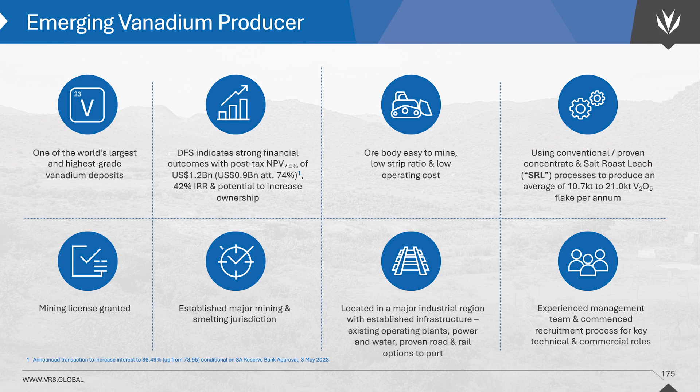We're in the Bushveld, an established mining and smelting operation jurisdiction. There's about 30 to 35 mining and smelting operations in the area, and because of that it's a major industrial hub. We've got mining, smelting, power, water, access to individuals, access to vanadium expertise, which is key here. We've got an experienced team who are currently in the recruitment process for developing our construction team.

Our market cap's low, it's $40 million, and the focus in the next few months is really bridging that gap, implementing our financing plan. We're in detailed discussions with debt financiers at the moment. We've got several term sheets across a range of different debt funding options. We'll be announcing offtake in the next few months and securing strategic investors as well.

Vanadium has two main areas: steel and alloys represents about 90% of the production of vanadium, and that's pretty much how our phase 1 project would be based on. In terms of getting this banked, it's around steel producers and getting that up to speed. We're getting good traction with steel producers with the vanadium pentoxide, so that's our phase 1 project.

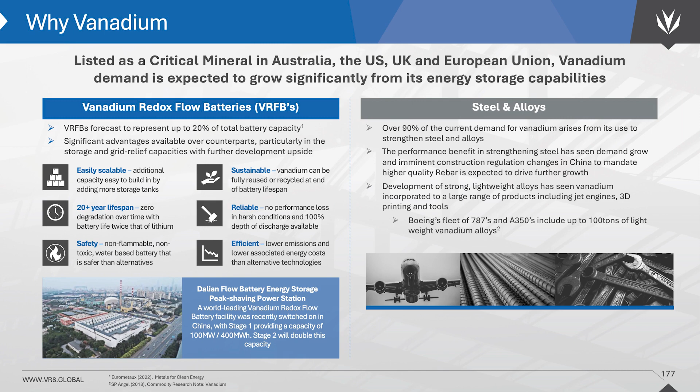Vanadium redox flow battery, for me, this is one of the exciting areas and one of the reasons why I've taken on the role. VRFBs, a good example is the 100 megawatt VRFB battery in Dalian, China. They commissioned and have been operating that since October last year. They're in the process of doubling capacity up to 200 megawatts. The key there is it's grid scale. It's a potential displacement of coal-fired and gas-fired power stations with renewable energy, and it's got the capability to do that, being a vanadium redox flow battery.

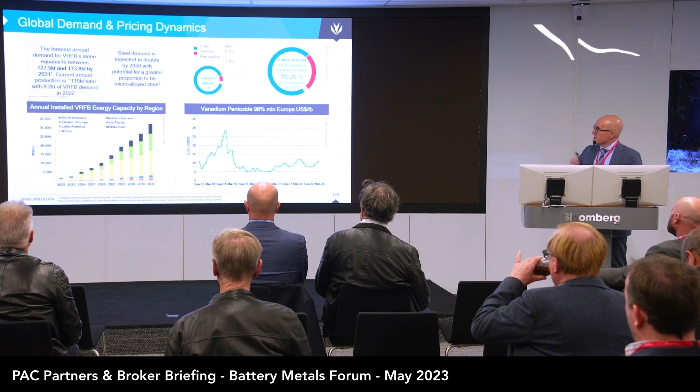The key point in this diagram is the circle in the middle. 90% represents the steel market, VRFB is currently about 6 to 7%, and aerospace for the pentoxide is 2 to 3%. The key here is the equity upside from my perspective once we're in production - 15 to 20% of the market will constitute production for vanadium for VRFBs.

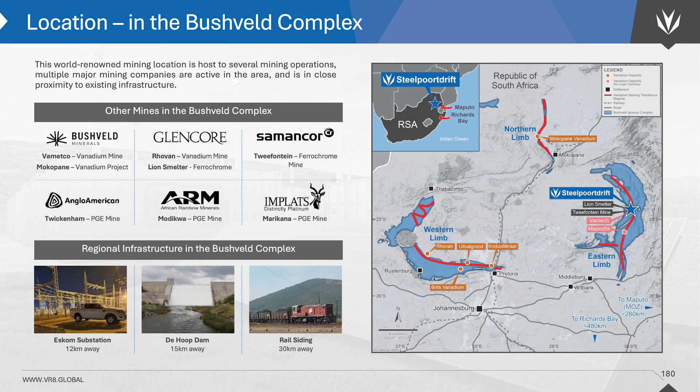We'll be looking to haul the concentrate across to the SRL plant, the salt roast leach site. And we're looking to put in an overland rope conveyor. Basically it's a ski lift with a hopper, and that'll remove the need to transport concentrate through the community and out through the road, and it'll be electrified.

And what we're doing on both sites is we're implementing solar and vanadium redox flow battery on the concentrate side, just big enough as a reserve for Eskom. There are issues with Eskom, and that's the reason why we're implementing that. And our partner on that, we've got the industrial park. They're building a 35 megawatt solar facility earmarked for us. We only need 13 megawatts of that, so it's plenty of excess capacity. And more importantly, it's a major mitigant for Eskom power.

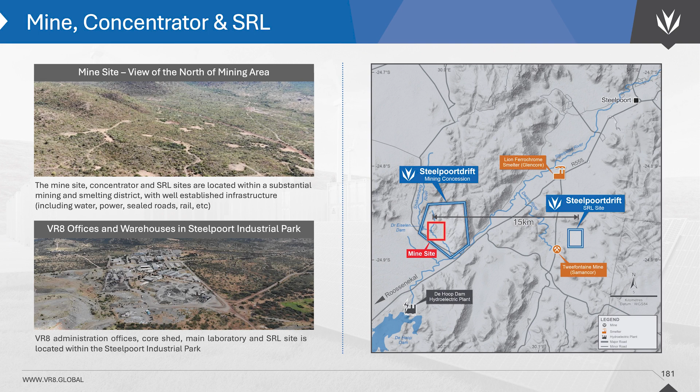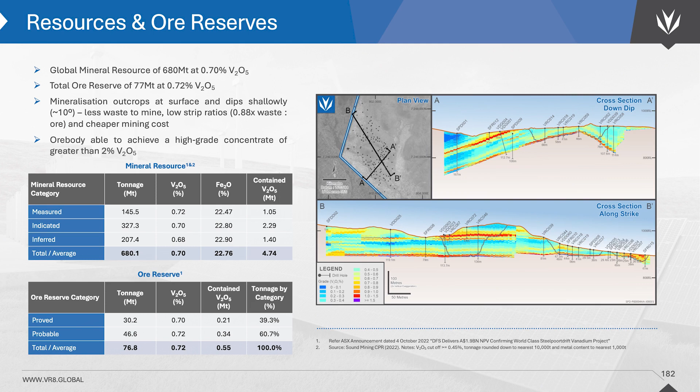I won't spend too much time on this, other than it's big, it's flat, it's outcropping, and we're only mining for the DFS about 12% of that. So we've got lots of upside and optionality.

Won't go into detail here, other than it's been used in the Bushveld. The flow sheet here on the concentrator and the SRL plant, techniques that are proven. In terms of getting banks across the line, I think this is bankable technically.

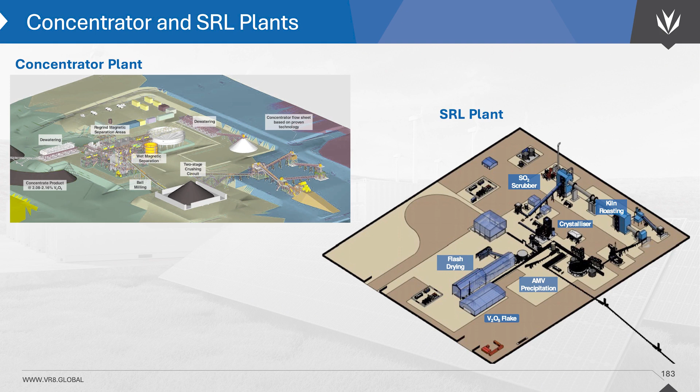In terms of, we're running several processes. At the moment, we're in discussions with debt financiers. We've got an advisor out of London. We've got several term sheets covering a range of different types of debt financing, from export credit agency, conventional project financings, PE funds to Nordic bonds. So we are exploring all the options.

What's one of the requirements here is long-term offtake, and we're talking to a series of strategic investors in offtake. We've been running that process for a few months since my appointment in January this year. One of the first cabs off the rank is Matrix Resources.

They're looking to secure 20%. We've got an MOU with them, and also another 20% as a sales agency. They've invested 10% of the company at a 40% premium. It's still only an MOU, but they're keen to convert that into an offtake. And there'll be more of these types of announcements coming through in the next few months. For me, this is critical for getting the debt, and I believe that we'll get there.

Timeline: we completed the DFS prior in October last year. We'll be well down the path on approvals with water environmental authorisations, probably by about Q3. The other work streams are - there's a lot of technical work there. We are reevaluating some parts of the project. Technically, we've recruited a general manager out of the Bushveld Minerals vanadium operation, so we try to incorporate that.

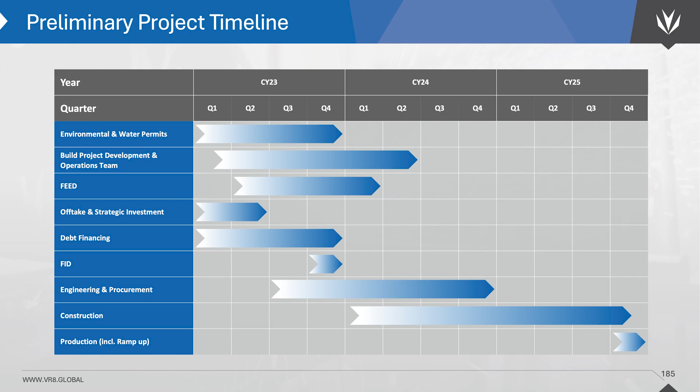And in terms of wrapping up, there's some of the key catalysts for this project is the offtake. That's the key for unlocking value. It also gives third-party validation. That's just due diligence underway. Also on the third-party validation is the technical DD that'll be coming on the debt financing. Term sheets are indicating about 65% gearing.

Theoretically, the banks are saying we can give you more debt. I'm an ex-banker, I'm not going to let this go over 65%. And then that'll give us our phase one. So that'll be basically off the back of steel manufacturing and offtake for that purpose. Once we've got that built, we'll then be ready. And once the vanadium redox flow battery - I think it's a wave that's coming.

I think it will be a game changer globally in terms of displacing coal-fired power stations and gas-fired power stations. So from my perspective, that's the key, getting to stage 2.

We've got a lot of optionality. Our resource is massive, so we're looking at a range of different feasibility options around that: selling our concentrate, selling ferrovanadium. Do we just make this bigger? Currently our base case is 1.5 million tonnes per annum. We can go to 3.5, we can go to 5, or 10 million tonnes per annum. Or should we add more products into our suite of production? We can do that, which is what the Bushveld operator is currently doing with other metals.

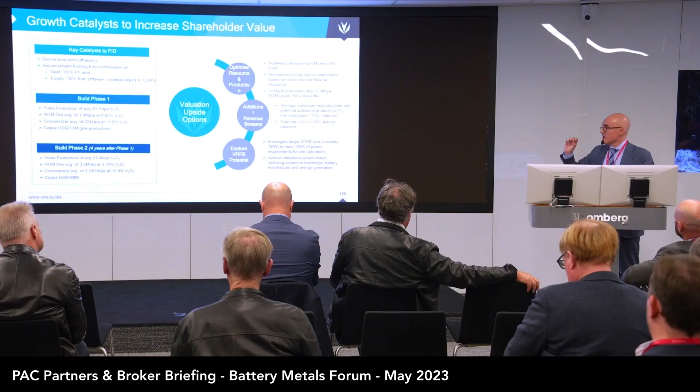That's it, basically.

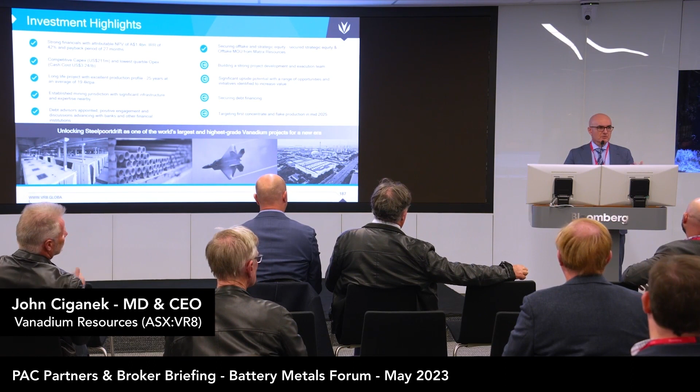How much is it the political instability in South Africa? I think outside of Africa, particularly US and particularly out of Australia and London, there's quite a negative perception around South Africa. So that's probably one of the bridges investors need to get their head around in terms of political risk in South Africa - that's probably the main roadblock with our market cap at the moment.

I think as we start delivering into our offtake and debt financing, some of that skepticism about building a project in South Africa is going to go away. The fact that we got Rabex in there for a 60% premium - they wanted to have a seat at the table with the offtake - so that's the key there.

Matrix, 40% premium as well, with the investment was around getting the offtake. They want the offtake. The other groups, we're having the same discussions there. It's really around, we want the product, and I'm saying you're not getting the product unless you give us a premium to where we are. And we don't want to dilute at these levels, so we've got lots of avenues with off-takers and strategic investors that we're running in parallel at the moment. So that's the reason why we're getting premiums with those types of strategics.

And with your financing, are they going to come from South African banks? Because we've cast the net out to about 25 banks globally, anybody that I've ever dealt with, so there are South African banks. There's a few there that are running the ruler across us. We've got term sheets from one particular bank that's going to put in debt and equity. Majority of the funding that we're getting interest out of is out of Europe, North America, and then the PE funds, they're global. So there's groups in South Africa.

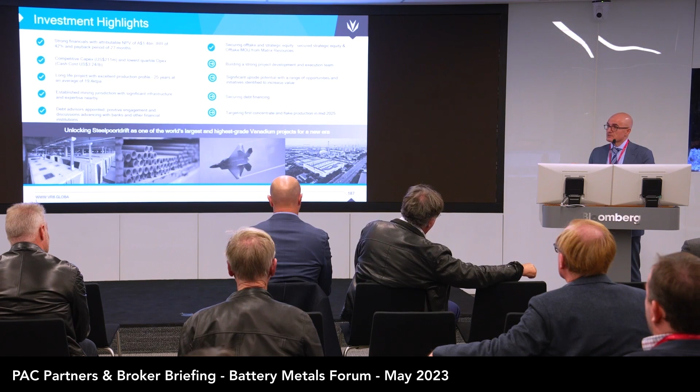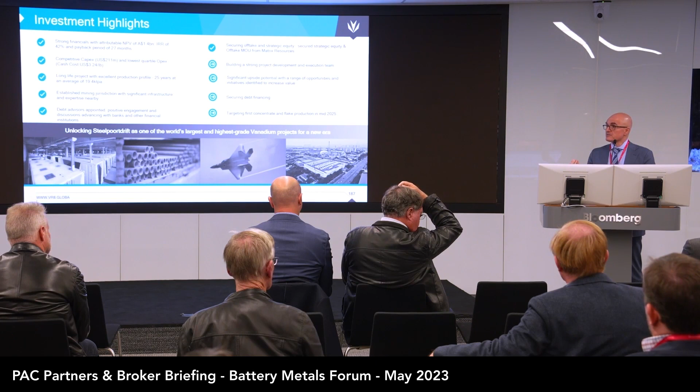So I think the proof's in the pudding in the next 12 to 24 months, once some of these larger scale facilities have been running for a period. In terms of banking that type of project, it's too early. I think banking this project around steel and alloy is the way to go here. And by the time we're in production, there'll be at least 2 or 3 years of new data around operating costs in particular, does this make sense or not? And then if it does, we're in the box seat.